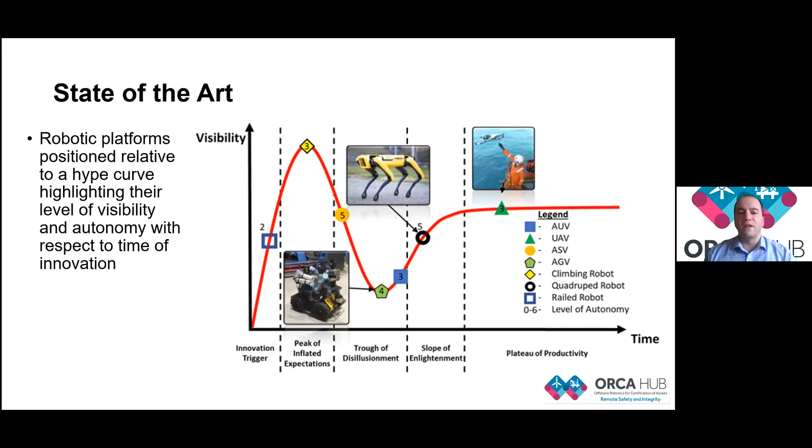And if, instead of treating autonomous systems as the one-size-fits-all solution, we apply the perspective that it is one element within a cyber-physical system - can we create a hyper-enabled capability where the robot is coordinating, collaborating, cooperating with the resident monitoring systems?

So this leads me into the proposition we're offering stakeholders and partners who engage with us - we want to give you, as part of this work, a cyber-physical architecture that transfers to your use cases. We're going to demonstrate it and verify it for you in this program of work, which concludes at the end of March next year. The enabler, the enticement we want to give you, is you can take this cyber-physical architecture we have designed, built and verified, and tune it to your operational needs, your robotic platform requirements.

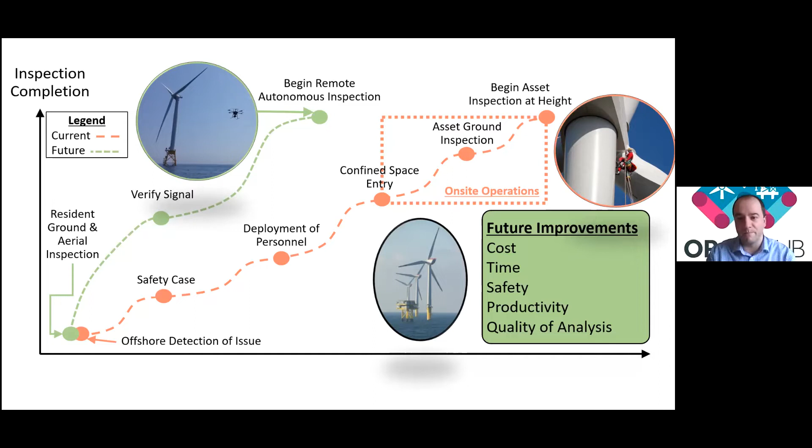Why? Well, it's to fast track how you can do reliability, safety, compliance and resilience. I appreciate these robotic platforms will just represent a risk and a cost burden until we remove those barriers. So what are we building on to date? What have we done?

I'm going to provide this presentation - of course it's being recorded, but I'm going to provide you with links to videos I'm sharing with you, which really set the foundations of how we've designed this work moving forward. So just very briefly, I'm going to be highly selective in the material I show you.

Firstly, thanks to the hard work of the team. We took existing information and knowledge, some online data that was available, and coupled it with a clear, addressable need of using autonomous underwater vehicles with low frequency sonar to inspect subsea power lines. That gave us an ability to actually provide advanced asset management and planning capability on that particular use case. We took the knowledge of the engineering team, because data and robots are not a substitute for knowledge, they're an enabler of that knowledge. So we created one of the world's first subsea cable asset management systems coupled with robotic assistance.

And what did that lead to? We could forecast fault type and location within about a month of failure accuracy. That met the design criteria for that challenge. It needed to be accurate within 2 to 3 months, given the nature of operations in that particular environment. So I'm providing that as an example of how we can achieve new levels of operational decision support for you.

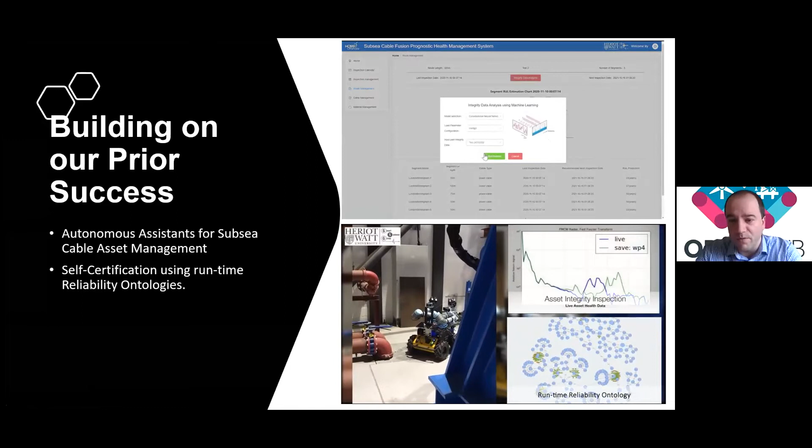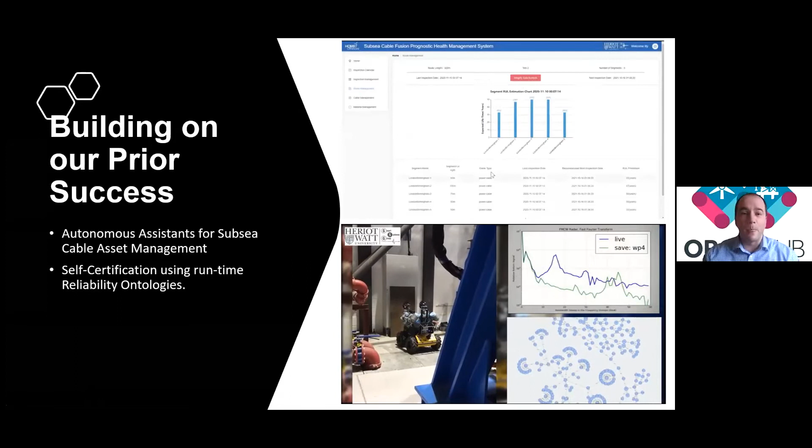Now, another issue, and a very pertinent one, relates to what is the runtime reliability of field robots. In the video at the bottom of your screen, you're seeing the Husky platform in a constrained space environment during the mission. This daisy chain you're seeing evolve at the bottom of the screen is us doing runtime reliability ontology. As the robot goes through different stages of its mission deployment, it uses different subsystems, and dependent on that usage, it will affect its reliability. So we've developed a way to devolve front-end runtime reliability and prognostics into these systems.

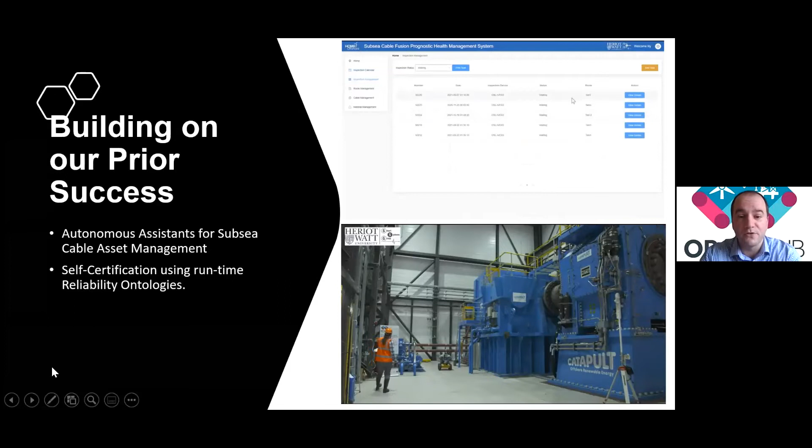And we can couple that with our cyber physical tools, which helps the remote human in the loop. I won't go over that in great detail because I'm just summarizing the standing start we have. That final video on reliability ontology, you're seeing it summarized in this wee infographic here. Very pleased to have published that in partnership with ClearPath.

Here's a really exciting part that I hope resonates with you all. Today, we have a symbiotic digital architecture that allows us to fully synchronize 1,000 devices and models into one environment, with full bi-directional communications, therefore control and knowledge exchange. So that's the blank canvas we have to work with.

That's a very powerful enabler, providing that runtime, near to real time, interactive engagement, the ability to query the resident system on an asset, on its own state of health. Now, the way that we support that human who has this unprecedented reach now, with this resident cyber physical system, is we embed these reliability ontologies within these frontline systems.

We know that for that human in the loop operator, it's about actionable information. It's not about big data streams.

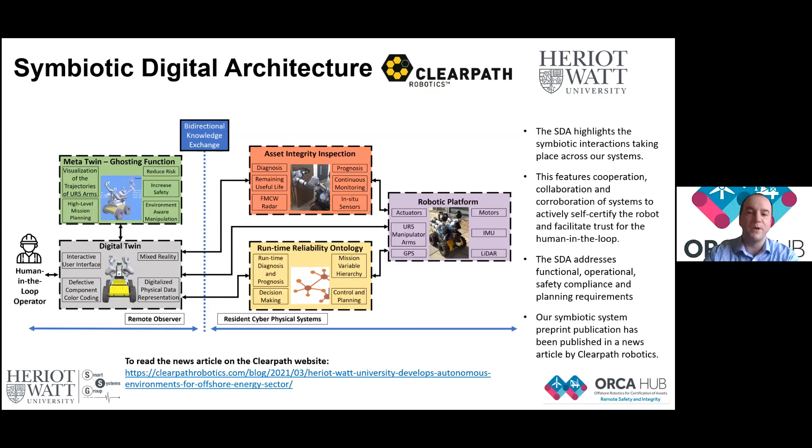Just to summarize, because I'm about to lead into the description of the experiment where we're inviting your engagement, and perhaps against even better judgment, our demonstrator is not going to have you witness us controlling a multi-robot fleet. We're actually going to devolve control to the stakeholders. We're going to give you a dashboard where you will inform the mission scenario, the variables, and we're going to make the environment that these robots are in very dynamic. So we're going to put this cyber-physical approach to resilience to the test.

So just a quick recap before I explain to you the experiment that you're getting to shape. We are taking a top-down view to address the operational barriers to resident autonomous assistants. We have this scalable symbiotic digital architecture. We've done it for individual robots, we've done it for large infrastructure, and in terms of digitalization, now we're able to synchronize the two together.

We have created runtime reliability ontologies as well as prognostic and health management analysis. Now that is a key part of both the resilience and safety piece. For example, if a component becomes compromised, it doesn't mean the mission is over. It means it can adapt in many instances and remain productive, but in a slightly more limited capacity.

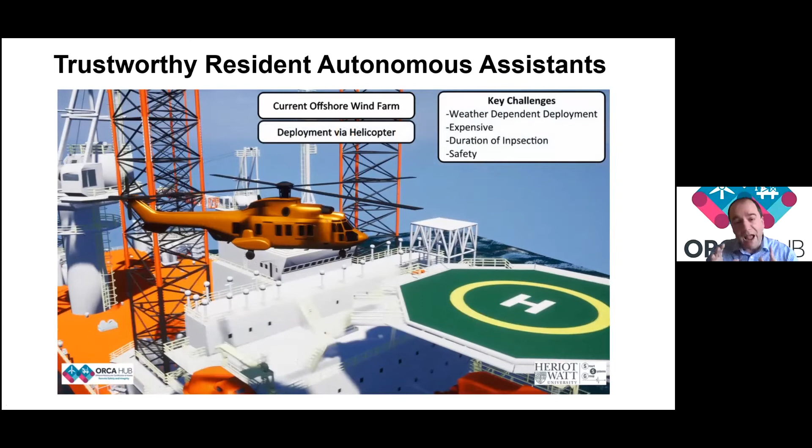This is me framing the context of this work. We're aware of how offshore operations are done today, and we've engaged with industry stakeholders to understand what the operational priorities are: how do you deploy people, the risk assessment, safety assessment, what tasks do you have them performing, and what dynamic constraints sit outside your control?

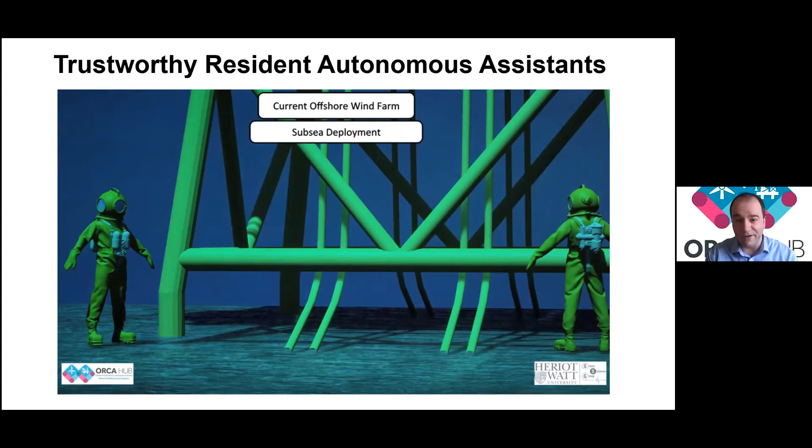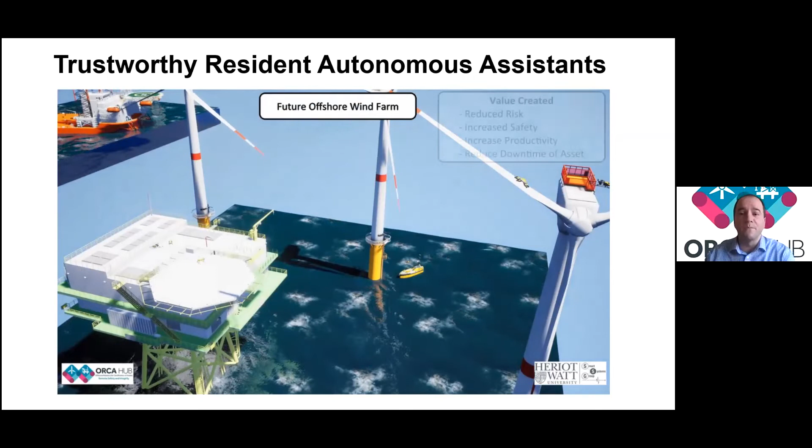We want to take people away from some of the more hazardous, challenging environment deployments. So we want to look at how we can embed a multi-robot team, which could be working in constrained spaces, subsea, or at height, to address risk, safety, productivity, and general downtime.

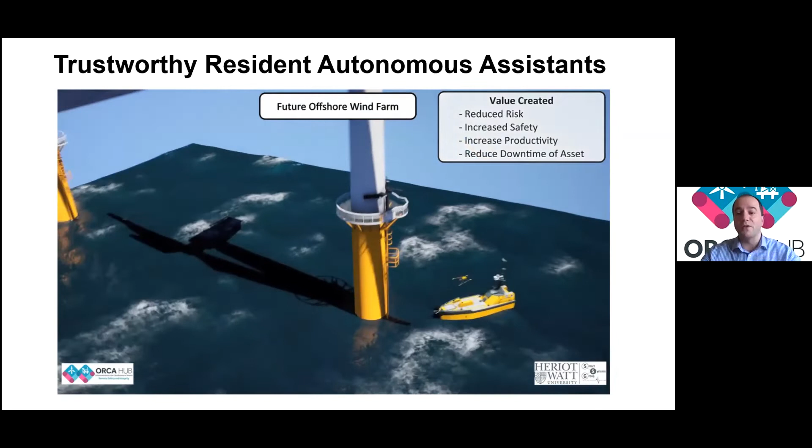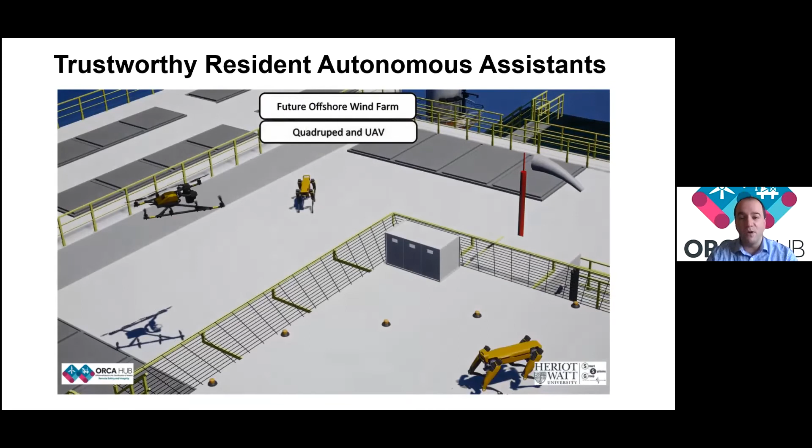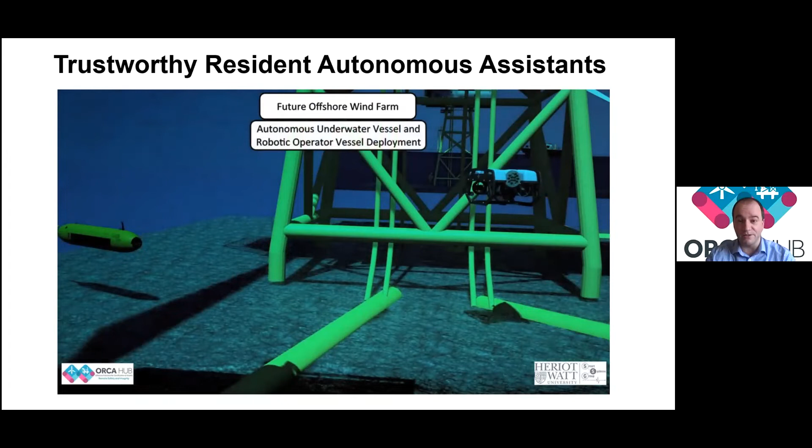There are other emerging trends the industrial sector will have to contend with, such as circular economy and other sustainability KPIs. We think these resident robots and AI architectures can really help address these emergent trends on the near horizon. So how are we going to do that, and create something representative?

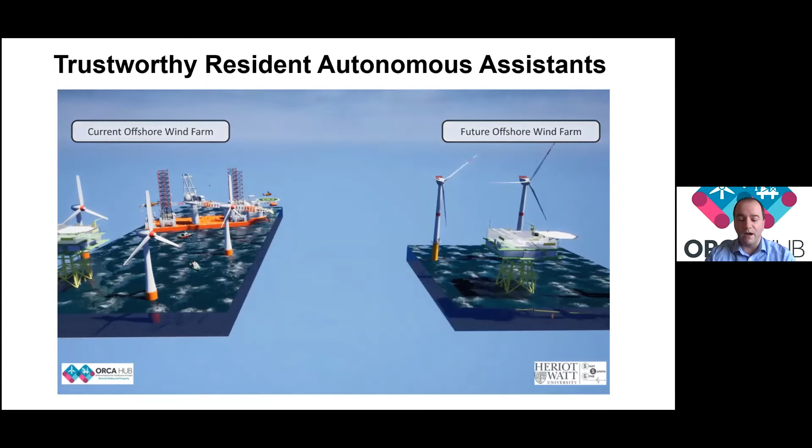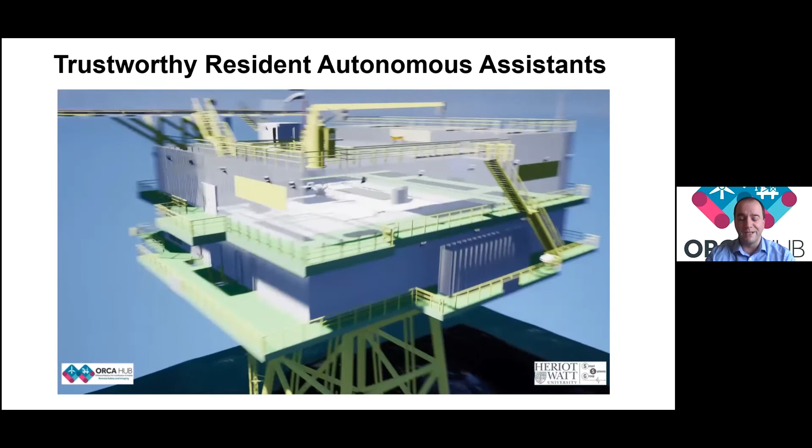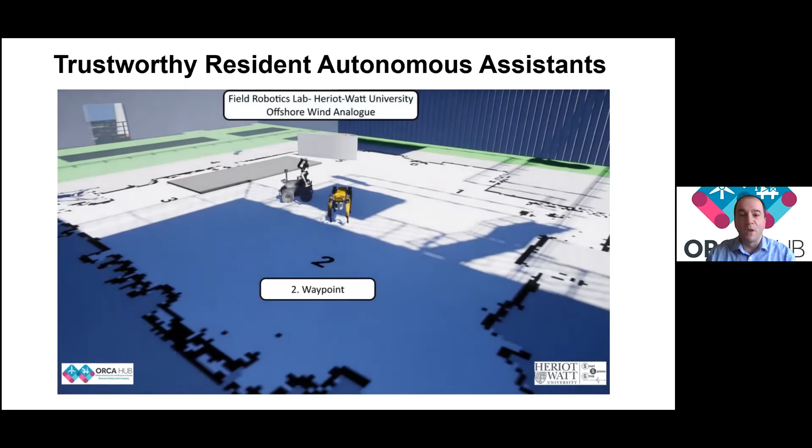What we're going to do, as the video will show, is take a well-defined use case. We're focused on asset integrity, and we're going to replicate the operational space of a facility within that offshore environment. In the nice, warm, comfortable labs of Heriot-Watt, to help mitigate the challenges of accessibility to offshore facilities, we are going to create a really dynamic operational space to perform two asset integrity inspection objectives.

One will be based on looking at corrosion under insulation on some ground-based assets. Another will be an aerial inspection looking at a composite. So two different structure types, both very important to asset integrity challenges.

We're going to replicate that specific mission space in our labs so we can create more variables in that space. We want to be able to adjust the environmental parameters, the safety case, and look at how we respond to faults or queries from the human operator. By taking a replica of that operational environment, putting it in the lab, and embedding actuators and sensors to make it more dynamic, we will look to verify how the cyber physical system can support resilience, reliability, safety, and compliance.

Now I've paused the screen here so you can see we have created symbiotic digital models of large petrochemical plants. We've done that for big infrastructure where people can intuitively engage, integrate, and collaborate with the information that's in situ. So we're taking that ability and integrating into that space these resident robotic digital twins with this fully live and interactive symbiotic digital architecture.

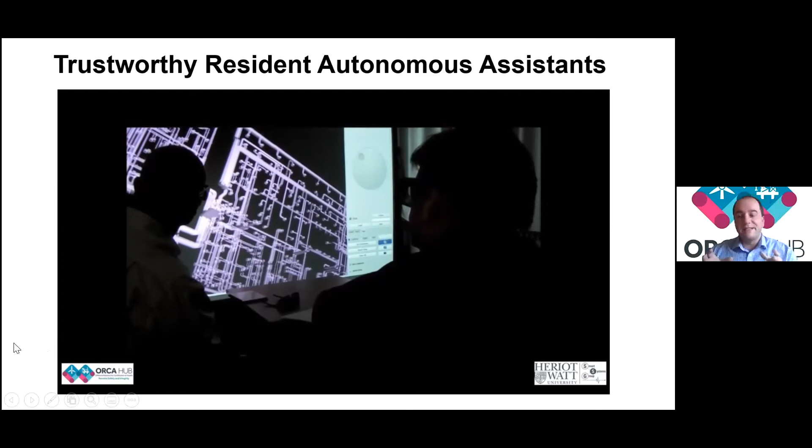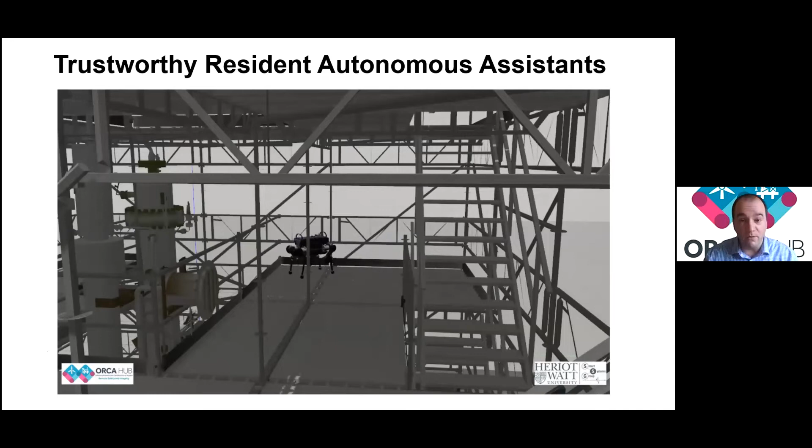Synchronizing these models, getting that accurate representation of that real-world environment, allows us to have connectivity to the resident operation, and also allows us to do pre-planning, where we can take a short-term view of what can be done in that particular space.

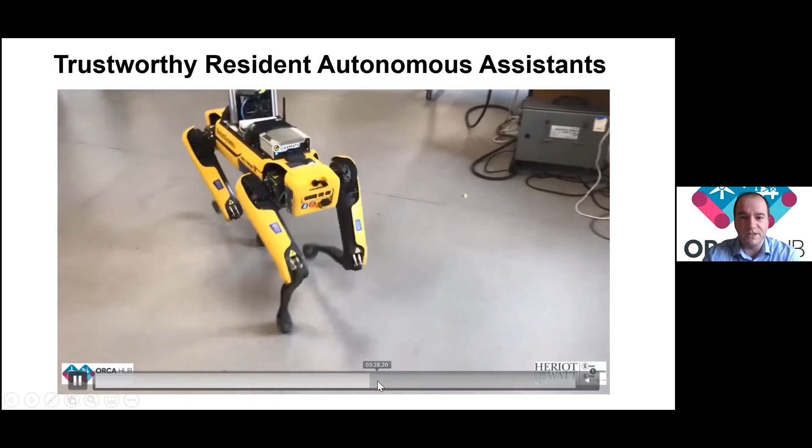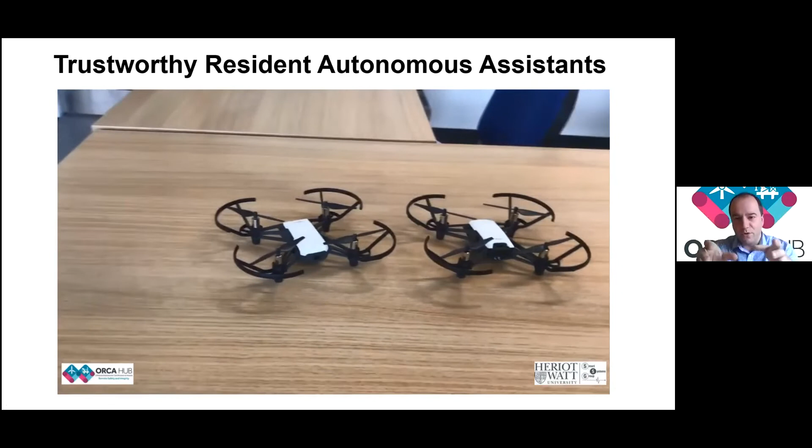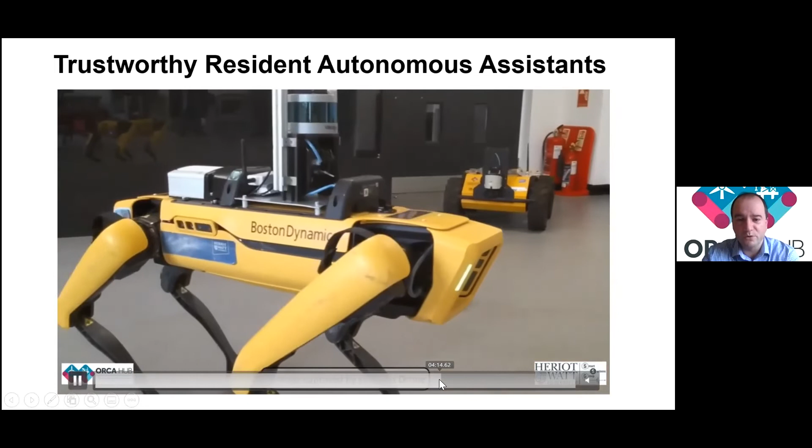I'm just going to speed up this video a little bit. Obviously you've no doubt seen this character well publicized by our team. As I say, we will build reliability ontologies that sit within these devices. This is the multi-robot team—these are your new work colleagues. Maybe not the most conversationalist at the Christmas party, but useful in the 9 till 5.

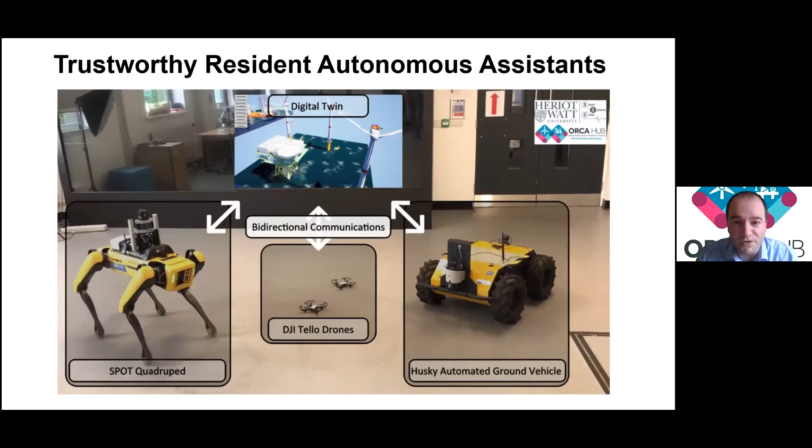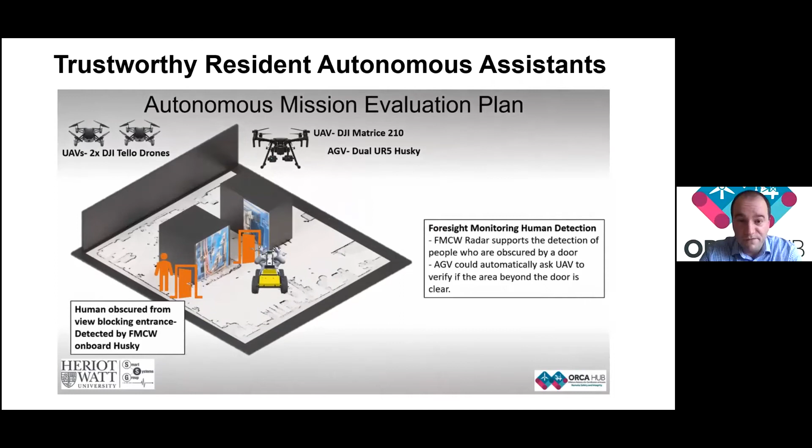We will put them into this dynamic environment in an integrated, coordinated way. How can they support each other on safety case queries? How can they support their individual reliability and resilience? If, for example, Spot has an emergent failure issue or a pathway is blocked that cannot be navigated, how can we then deploy them? I won't take you through the full animation, but it's trying to articulate how we will replicate that environment.

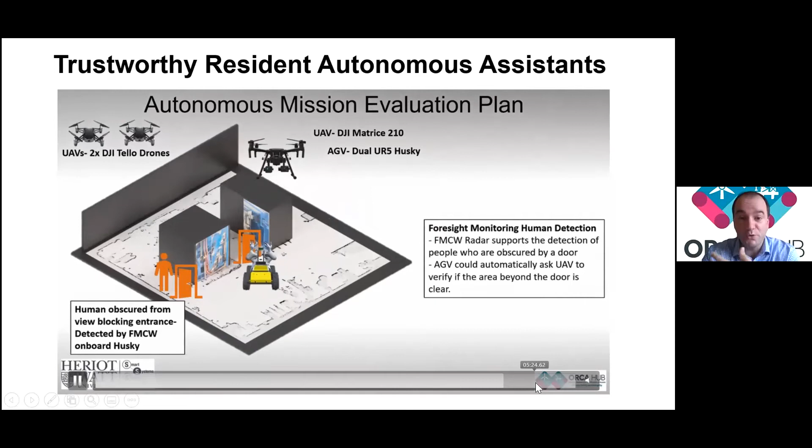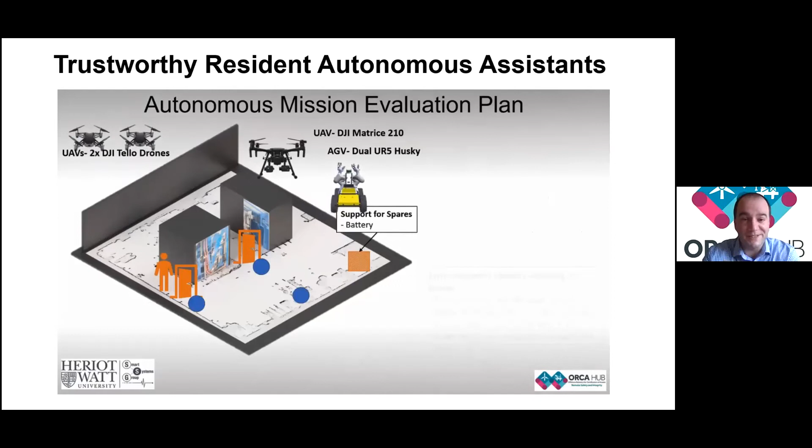We will embed the challenges you see as being the most pertinent, and this is to give you this transferable cyber physical architecture so you can create trustworthy autonomous assistants. So that's painting the scene. Now, the dashboard I made reference to, and no doubt could be a point of regret in the future because it makes it very challenging, but this is what we should do.

We focus on the challenges, we focus on the knowledge gaps. We've defined these 4 thematic variables, and we are going to work with you using what we call persona charts. I'm going to let you see what one of them looks like.

So I'll let you see what one of these charts looks like, so that we can capture some of the operational requirements, risks, safety concerns that are vital for trustworthy assistants. With your feedback and engagement, we would work to define and create a solution to that specific challenge. When it comes to verifiability, we will randomize the variables in this use case, and once fully developed, we will hand control to you so that you can interrogate the system.

So we have this field robotics lab at Heriot-Watt. We're going to instrument the infrastructure. We have decommissioned wind turbine blades and other large assets that we're going to inspect for asset integrity requirements. We've got some really interesting and novel non-destructive evaluation technologies being used as well, such as frequency modulated continuous wave radar, which allows us to do surface and subsurface scans of structures through non-contact. That's very exciting as well.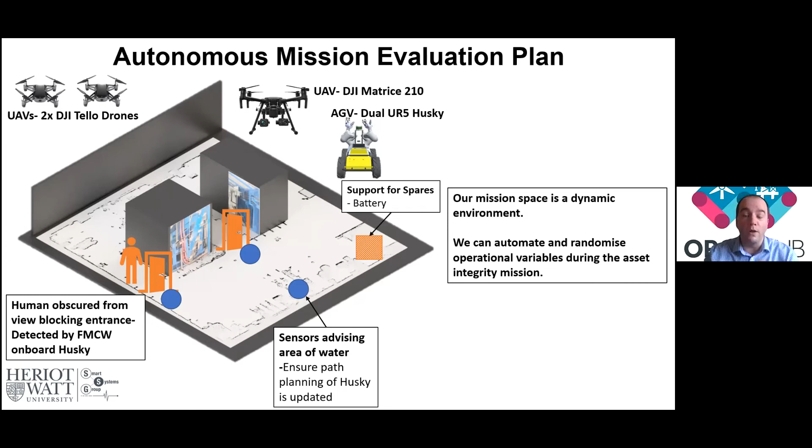But the core focus, the primary objective of this research, is how can we mitigate the risks that are clearly there in the dynamic world. If we have, for example, a person approaching a doorway, a point of entry into what is a constrained environment, how can we have foresight to understand that risk is emerging, and how can we respond proportionately without simply stopping all operational productivity?

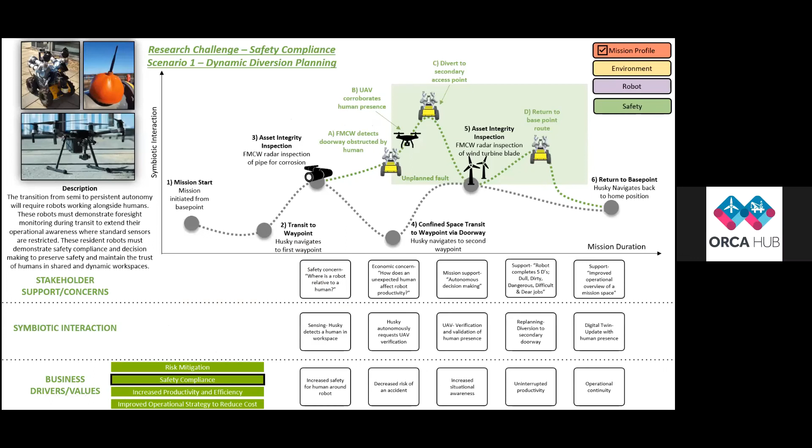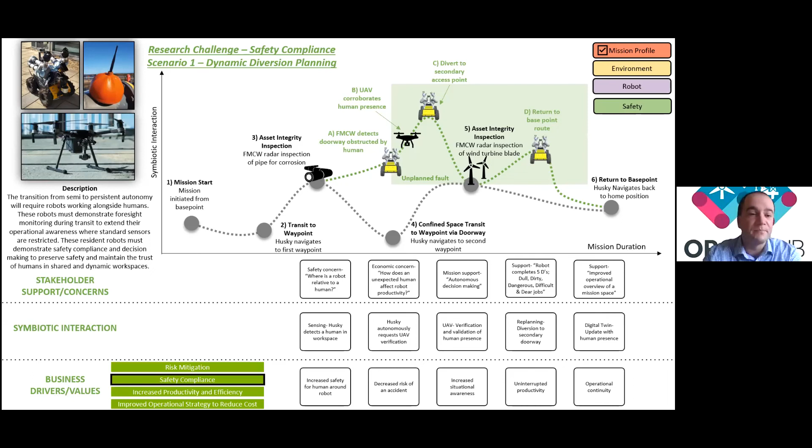Thank you, David. So, how we capture your feedback, we're going to use these persona diagrams to map through these. There's 4 thematic scenarios. We want to capture the issues you want us to deal with, and we'll develop mitigation strategies. How could the symbiotic system coordinate, collaborate, and cooperate? You've seen this dashboard, and we will make that available to our stakeholders and participants in this experiment.

In summary and in closing, we want to give you this cyber physical architecture. It's going to be modular and tunable to how you address resilience, reliability, and safety compliance. We will work with the personas that you help us to populate. We're actually going to devolve control to you when it comes to engaging with and hopefully trusting in the cyber physical solution. We see that as a great enabler to the future needs of scalable multi-robot fleets. If you wish to see any of the information provided, there are video links to it.